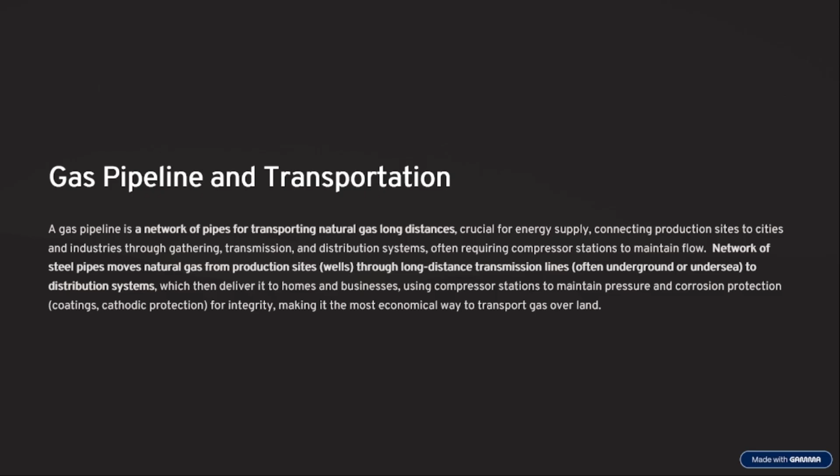All right, so it could be done over sea or underground. Sorry, under the ground or under the sea. It all depends on what you are dealing with at a point in time.

So your piping in HYSYS involves modeling and simulating piping systems by specifying pipe size, flow rate, pressure drops, and temperature changes for fluid being transported in the process. The software provides comprehensive tools to define pipe characteristics and predict fluid behavior under various operating conditions.

So you have your pipe systems, which defines the pipe characteristics, including the diameter, the length of the pipe, the insulation, and material using the piping blocks in the simulation. So we have the pipe segments, we have the pipe hydraulics in Aspen HYSYS, which you could be using to simulate that. And you need to put in the diameter, the length of the pipe. You can also add things like elevation, depression, and all of that in your simulation for the pipe.

Then you have the flow and pressure drop. It calculates pressure drop due to friction, elevation changes, and fittings using the Darcy-Weisbach equation or empirical correlations. All right, so along the pipe, definitely there's going to be pressure drop. That's why we have compressor stations situated at certain locations to enable us to boost the pressure of the gas to enable the transportation of that gas.

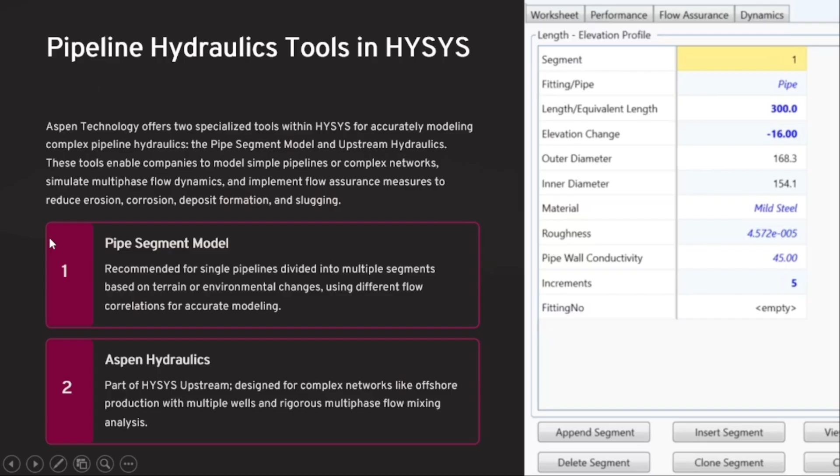All right, then we have the Aspen Hydraulics. So it's part of HYSYS Upstream designed for complex networks like offshore production with multiple wells and rigorous multi-phase flow mixing analysis. Okay, so the thermodynamic properties and pipe insulation.

Now, one thing with HYSYS is definitely any calculation that's been done on HYSYS deals with thermodynamic properties. We have different thermodynamic models in Aspen HYSYS, which could enable you to perform any simulation you want to, depending on the process. So if you are going to be dealing with things like dehydration process, making use of things like triethylene glycol, that's TEG, you can also make use of MEG and things like that, or you are trying to perform a reaction process. Definitely, there are different thermodynamic models that enable you to perform these simulations on Aspen HYSYS.

So the thermodynamic model is one of the fundamental things we need to understand when trying to make use of Aspen HYSYS, because using the wrong thermodynamic model is likely going to give you wrong results. Yes, you might have results, but those results might not be accurate because you didn't make use of the appropriate thermodynamic model. All right, so thermodynamic properties and pipe insulation.

So we have fluid properties, and under that, HYSYS defines thermodynamic properties of fluids, gases, liquids, or slurries, and calculates flow behaviors in pipes. The software employs fluid models such as the Peng-Robinson, which is one of the most common thermodynamic models used in Aspen HYSYS, or the Redlich-Kwong equation of state to predict phase behavior and fluid properties accurately.

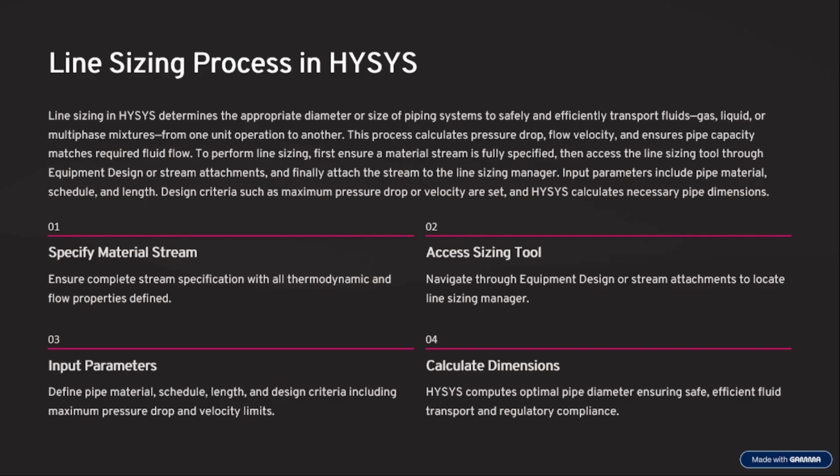All right. So now line sizing involves a trial and error process to find a pipe diameter that meets both velocity and pressure drop criteria for a given flow rate and fluid. So usually the general formula is the flow is equal to the velocity times the cross-sectional area, where the area is calculated using the pipe internal diameter with the formula, that's the area of the pipe, which is pi d squared over 4, where d is your diameter.

All right, and this calculation often uses a preliminary diameter based on the maximum velocity and then checks the resulting pressure drop against design limits. All right, so usually whenever you're trying to calculate the appropriate size of the pipe that should be used, most times it's always advisable to make sure the velocity of that pipe is less than 25.

Sorry, the velocity of the gas that is being transported is less than or equal to 25 meters per second. It's usually advisable to keep it within that range, less than or at 25 meters per second. It's very important. That's another key thing. So remember, we said this is a trial and error method. Most times you try with different pipe schedule and size. Once you calculate it, you get the velocity.

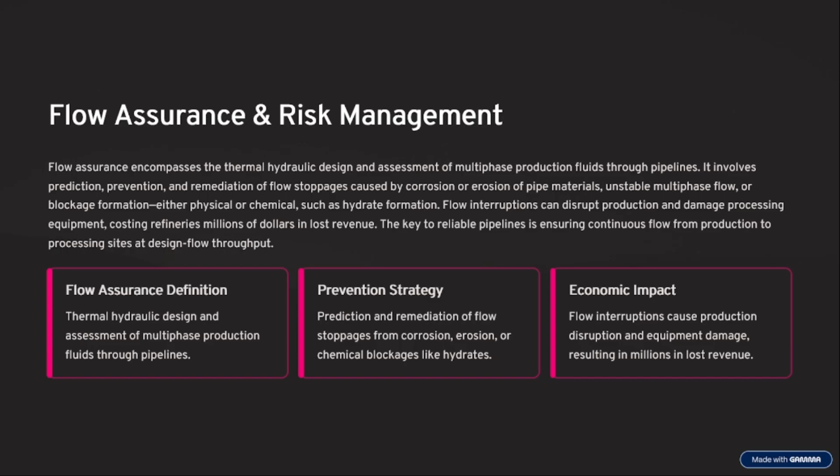So now let's look at hydrate formations. We've talked about a lot of things. We've mentioned hydrates. So now let's look at what this hydrate is all about. So hydrate formation in pipelines occurs when water molecules trap gas molecules like methane, ethane, or propane in a cage-like solid crystalline structure under high pressure and low temperature conditions.

So most times your hydrate forms when water is present and then some hydrocarbons such as your methane, ethane, propane. We still have some things like nitrogen, CO2. When all these things are present, it causes a crystal structure to form. Most times it might look like ice, but it's not really ice.

It just forms a crystal structure, and then this could actually block your pipes once this is being formed. Okay, so when this is formed, it could block your pipe, which could cause equipment damage, production loss, and safety hazard. So we need to try and observe the operations of this pipeline, all right, because most time this happens under high pressure and low temperature.

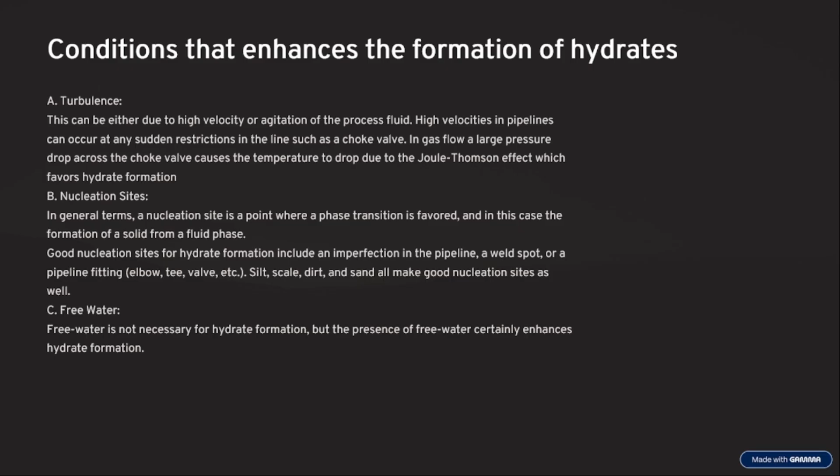Another one is the nucleation site. In general terms, the nucleation site is a point where a phase transition is favored, and in this case, the formation of a solid from a fluid phase. So good nucleation sites for hydrate formation include an imperfection in the pipeline, like a weld spot, or a pipeline fitting, which could be the elbow, the tee, or the valves, silt, scales, dirt, sand. They all make good nucleation sites as well, all right? Then you have free water. Free water is not necessary for hydrate formation, but the presence of free water certainly enhances the hydrate formation. All right, so these are some of the conditions that enhance the hydrate formation.

So HYSYS uses a utility, which is the hydrate formation utility, which predicts the hydrate formation temperature of any defined stream for a given stream pressure and the hydrate formation pressure for a given stream temperature. So what this does, it observes the temperature and the pressure, and then it sees at what point you are going to have hydrates being formed in that particular stream, especially when designing the pipeline for that stream.

All right, so to model the hydrate formation in pipeline in HYSYS, you must first define the fluid package. Remember, I talked about fluid package, your equation of state, and most times for this particular simulation, we are going to be using the Peng-Robinson equation of state, and the stream properties, which include water and other components. Then you create a pipeline model and use the hydrate formation utility or hydrate analysis feature to determine the hydrate formation temperature at various pressure and temperature conditions along the pipeline. The simulation predicts hydrate formation if the actual stream temperature is below the calculated hydrate formation temperature.

So now let's look at hydrate prevention. All right, so how do we prevent hydrates from being formed in your pipeline? The first one involves the removal of water. All right, these are ways we can prevent hydrate from being formed. We can remove the water, alter the temperature or pressure, or use chemical inhibitors to stop solid ice-like crystals from blocking the flow, using methods like glycol dehydration, injecting methanol or glycols, or applying low dosage inhibitors to disrupt the hydrate formation under high pressure and low temperatures. We are going to be seeing how some of this works very soon.

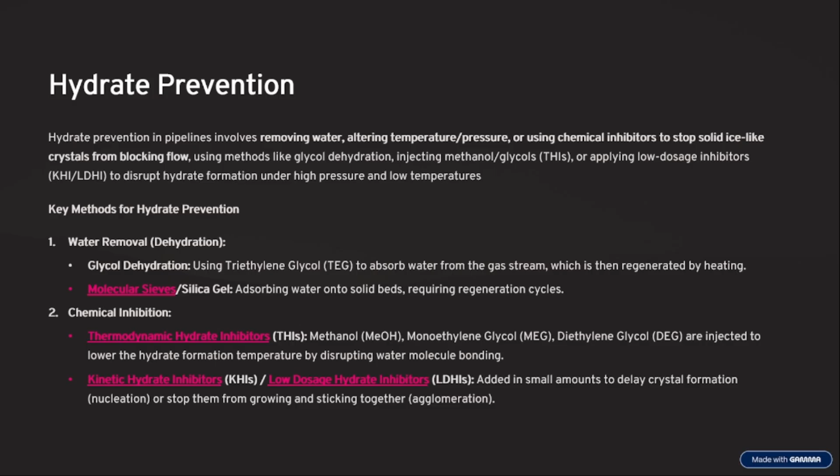Then you have the operating condition control. Remember, low temperature, high pressure causes the formation of hydrates. So you need to alter this operating condition so that you don't have hydrates being formed. Then you have your heat conservation, so your insulation for subsea lines. Insulation helps to retain heat, keeping the temperature above the hydrate formation conditions. All right, so these are part of the ways to prevent your hydrates from being formed.

All right, so before we quickly go into the simulation, we can take questions for just 5 minutes. Any question so far? All right, so I think we don't have any question. Any doubt? All right, so if you understand what I've been saying, you can just drop a thumbs up. Yeah, drop a thumbs up.

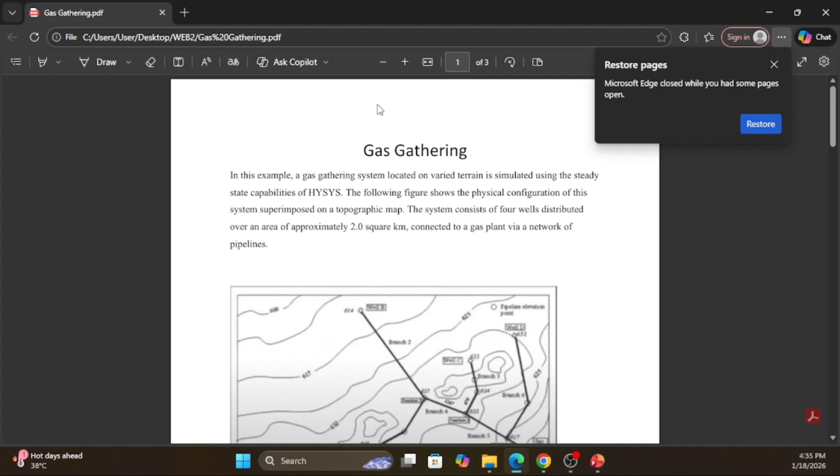So part of the things we are going to be looking at is a simple gas gathering process. Some of us might have seen this before, but if you've not, we're going to be dealing with a gas gathering process because this is one of the best ways to explain how gas is being transported. Some people might have seen different videos on YouTube, but there are some things you need to understand with this process of gas gathering, which we are going to be dealing with today as well. Let's just wait.

Yeah, okay, someone's hand is raised. Yes, Sid, I can see your hand is raised. Any question? Hi, sir. Is it an exercise or what should we do? All right, so it's going to be an exercise. We're going to go through it together. I'm going to show you how it's being done, so you don't need to bother too much. Okay. Yeah, okay, I'm coming. All right.

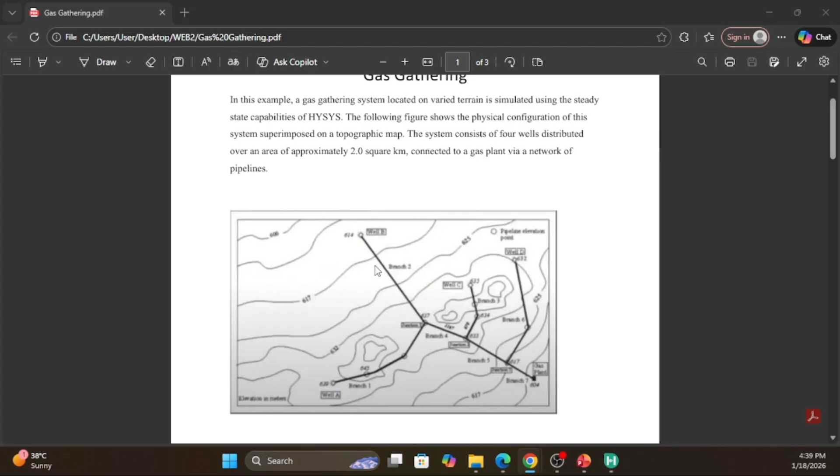Now, the main idea of this is that this is where geologists and chemical engineers come into play, because to interpret this particular pipeline, you also need geologists. These are the ones that will tell you how the terrain is like, what elevation you're going to be having, what depressions you're going to be having, and then you'll be able to input all of this into your HYSYS model.

What we have here is a topographic map, and these lines you see here are usually called contour lines. For some of us that did geography in high school, or secondary school, as we call it in Nigeria here; other places they call it high school. So people that did geography should know that these are called contour lines.

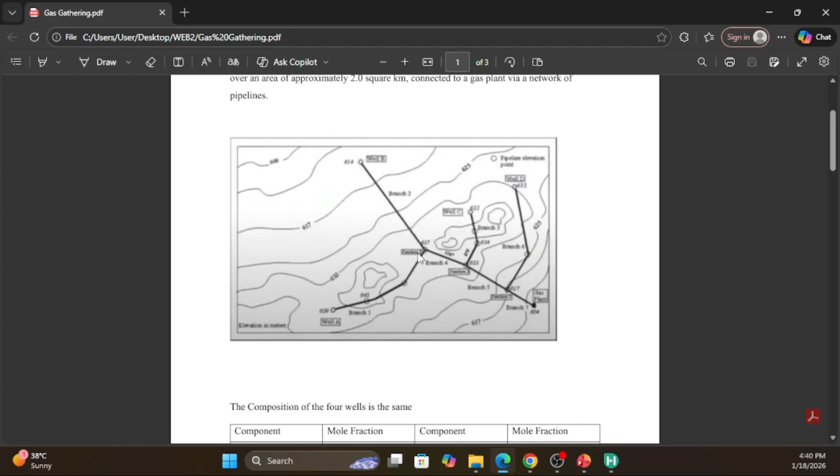This is your topographic map, and this is how the gas is supposed to be transported. These dark lines here are the pipelines. All right, so let's quickly get to it. Let's get our components and then we move on. So let me split my screen.

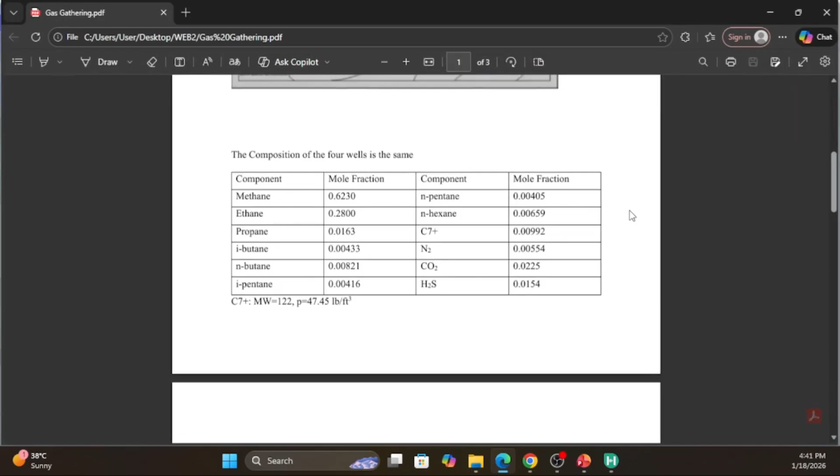Okay. So let's quickly add the components. We're going to start with methane, ethane, propane down to n-hexane. All right. So let's just add that.

This C7 plus is supposed to be a hypothetical component, but I'm just going to add heptane to represent it. That's why we have this molecular weight here and the liquid density for it. These are the key things to define this particular C7 plus. But I'm just going to use heptane for it for now. So just going to add all of this.

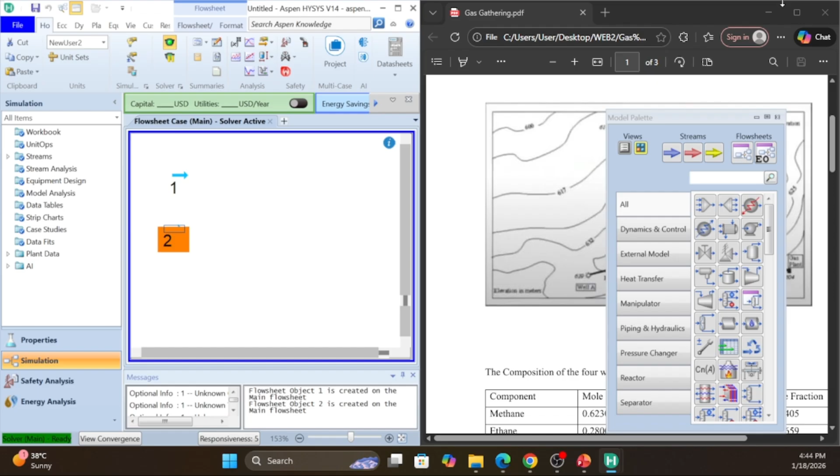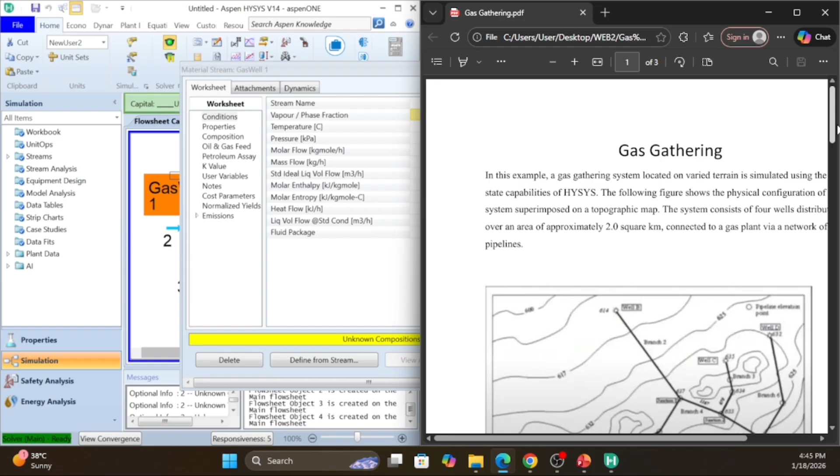So I'm just going to quickly start by adding 4 streams, and these 4 streams would represent our different gas wells. You can see we have well A, well B, well C, and well D. Well A is going to be my gas well 1. And then let's quickly get the specifications for this. So from what we have here, all of them are using the same mole fractions. They have the same composition. So let me just add the composition for this.

So we have 0.623, 0.28, 0.0163, 0.00433, 0.00821, 0.00416. N-pentane 0.00405, 0.00659. We have N-heptane 0.00992. Then nitrogen is 0.00554, and then CO2 is 0.0225, and hydrogen sulfide is 0.0154. All right, so after you add your mole fractions, all of these have to add up to 1.

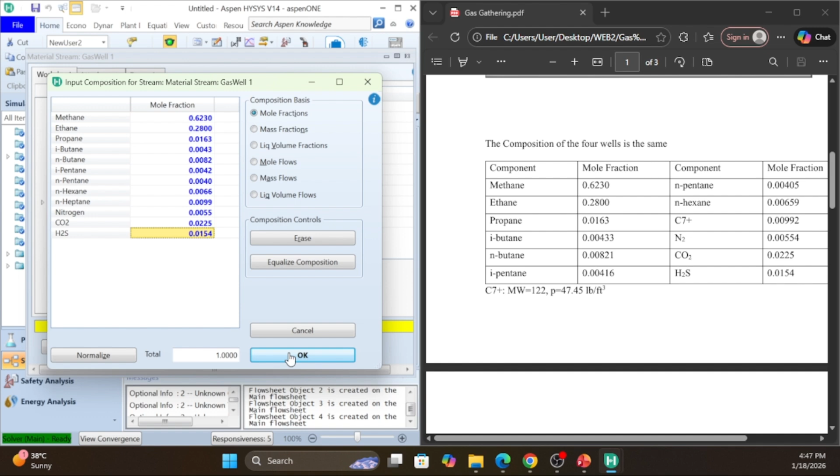If you are defining your flow rate in mole flow, it's advisable to give your fraction in mole fraction. If your flow rate is in mass flow, your fraction should be in mass fraction. If your flow rate is in mole flow, your fraction should be in mole fraction. So these are some of the things we need to note when designing with Aspen HYSYS. The next thing we are going to look at is our temperature, pressure, and the flow rate.

So the flow rate here is in mole flow. You can see kilogram mole per hour. So we go back to conditions and put in the temperature for gas well 1, which is 40. We have a pressure of 4135 kilopascal, and then the mole flow is 425. Okay, so with that, we go forward. You can see this stream is fully defined. That's why you have this indicator here showing OK, and you can see this has a deep blue on it compared to this one, which is lighter blue.

So the next thing we are going to be doing is defining the remaining gas wells. So remember, they all have the same mole fraction. So I'm just going to name this gas well 2, which is your well B.

All right, and then I'm going to call this, okay, the temperature for this one is 45 degrees Celsius. We have a pressure of 3450, and we have a mole flow of 375. Now we need to define the composition. Because I've defined it in the first one, I don't need to start inputting the composition again.

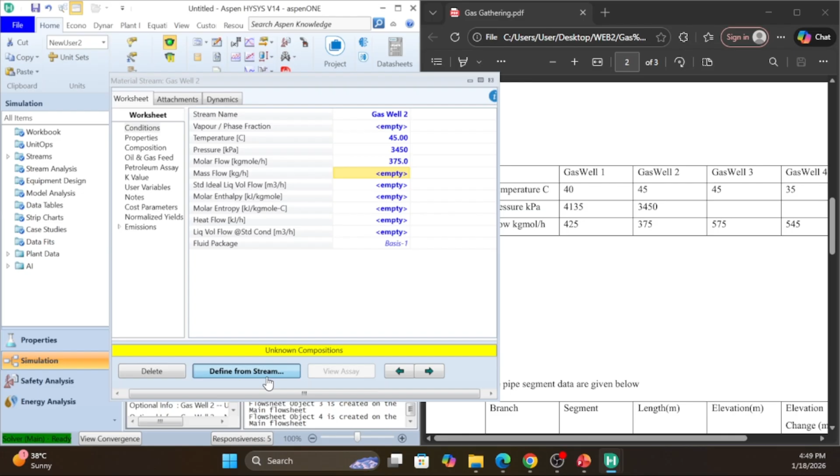All I need to do is go to define from stream. I'll select my gas well 1 and then take off this, take off all of this and just select composition. So this is copy stream condition from gas well 1 and I'm sending it to gas well 2. All right, so with that, you can see the indicator is showing OK, meaning that this stream is fully defined and ready for use. Now I'm going to define the third one.

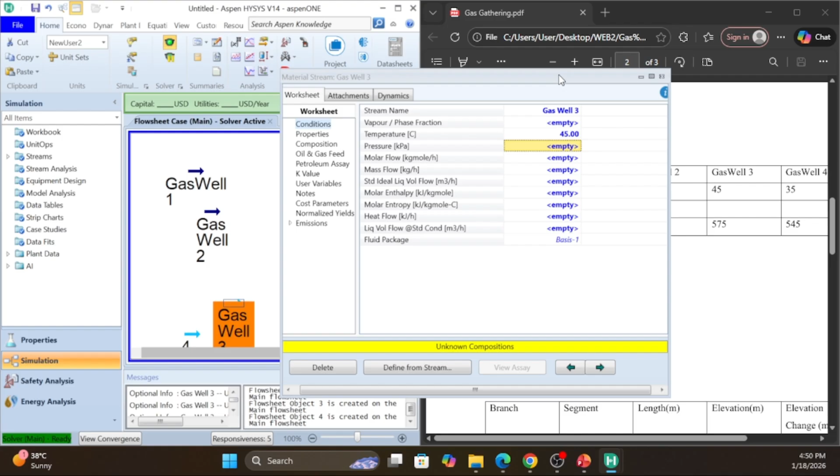All right, okay, I'm going to define the third one. I'm just going to call this gas well 3. Okay, and the temperature for this is 45, and the flow rate is given as 575. All right, so what I just need to do now, I'm going to make use of the pressure of gas well 1 for my gas well 3. To do that, select the composition and pressure from gas well 1, and I'll use it to define this, and then let me do the last one.

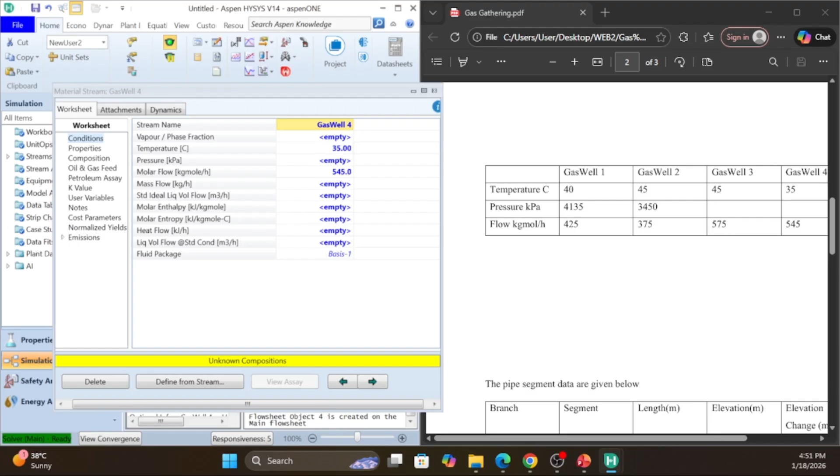All right, so this is gas well 4, and the temperature there is 35, and your flow rate is 545. All right, then your composition, okay, we're just going to use the pressure from gas well 2 to define this. So what to just do here, define from stream, and then yes, gas well 2, pressure and composition, click on OK, and we are good to go. All right, so now we have our 4 wells defined.

Now let's start with our pipes. So the first one we are going to be making use of is the branch 1, which is for gas well 1. And then this is the branch here. And for this branch, we are having 3 segments. So from here to here is segment 1. From here to here is segment 2. And from here to here is segment 3. So these are the sections along this pipeline. So we're going to be having 3 segments for branch 1. So let's quickly add that.

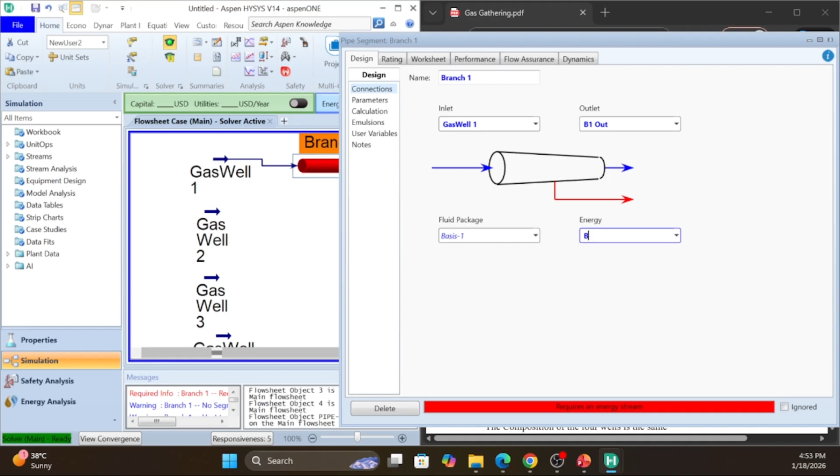Let's get our pipes. So we have pipe segment. So we just put this here. And then we name this branch 1. Our inlet is going to be gas well 1. And our outlet is going to be B1 out. That's just to represent branch 1 out. And then your energy stream, which is compulsory, we will just name this B1Q, which is branch 1 energy stream. Okay. Now we go to ratings and then we add the segment.

Now for this one, we have some specifications. Remember we have 3 segments here, and I've explained to you how this segment looks on the map. So this is branch 1, segment 1, 2, and 3. So for segment 1 here, the length is 150. So we have 150 meters, and then you have an elevation of 645 meters, but it's the elevation change we are going to be making use of, which is 6 meters. So we have elevation change here, 6 meters.

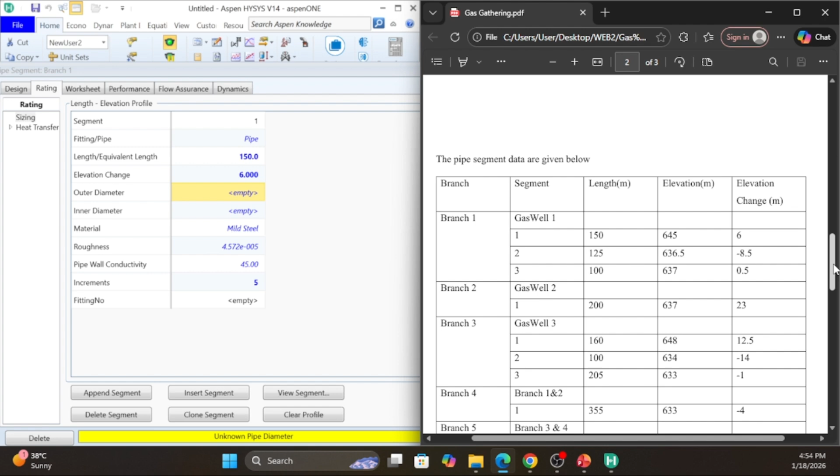Now to select the diameter, this particular one has already been calculated and they've already gotten the size of the pipes. So we just come here. This is the diameter here, 76.2. You can double click on the outer diameter and this will come up, or you go to view segments and you have this diameter come up. Now, this is the actual size. If you have the actual size of your pipe based on the calculations you've done, you can give that information here, just input it under actual.

And then remember I talked about different schedules, schedule 10, schedule 20, schedule 30, schedule 40. And each of the schedules has different diameters. Now, this is schedule 10, for example. The nominal diameter you can see from 350 to 900 millimeters. You see that it's quite high. Schedule 20, this is from 250 to 900. You have schedule 30, from 200 to 900. And then you have schedule 40, which contains the one we want to make use of. Remember our size is 76.2. So see we have from 6 to 900.

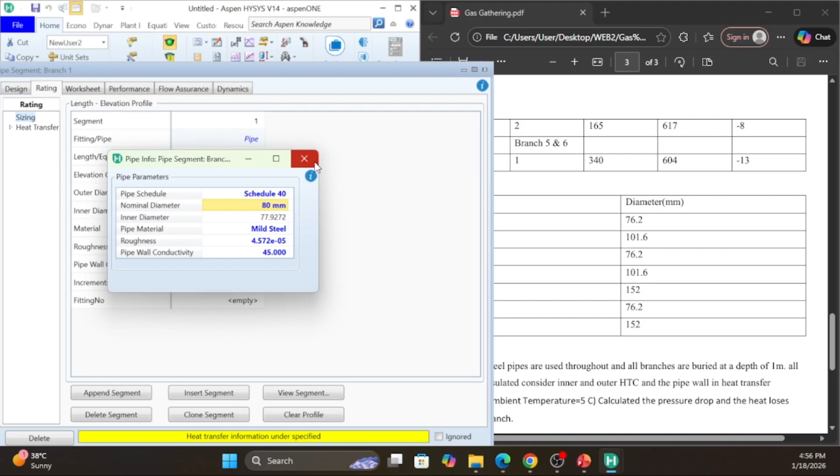So we're going to make use of schedule 40, and we don't have 76.2, but we have 80 millimeters. So most times you just go for the next size to the actual diameter that was given here. So we just go to 80 millimeters, and you can see the inner diameter is 77.92. And we close this, so you can see outer diameter is 88.90, inner diameter 77.93. Okay, now we need to add 2 more segments. So I'm going to click on append segment.

Click on it twice so that we can have segment 1, 2, and 3. All right, so let's add that. So the length of segment 2 is 125. Elevation change is minus 8.5.

Now on the map, the elevation is 645. That's where this first segment is. Now the difference between this elevation here and the next one: this negative sign represents a depression actually, not an elevation. Positive sign is for elevation, negative sign is for depression. So on the map there is a depression. That's why we have a change on the map.

And you see this is 636.5. And then you can see that is minus 8.5. So if you do a subtraction here, you see we have minus 8.5. So that's where this elevation change came about. And then the diameter, in the case of schedule 40, still make use of 80 millimeters. And then for the last one, this is length of 100, still making use of schedule 40.

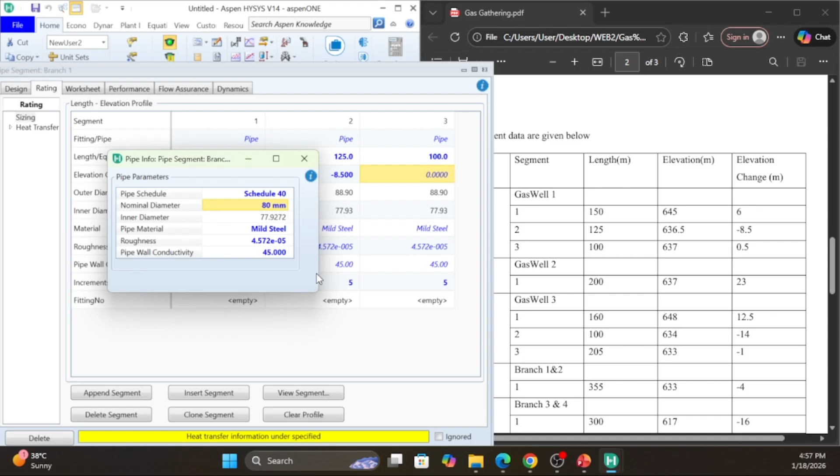Diameter is 80 millimeters. So you see from the notification bar here, heat transfer information is under specified. So we go to heat transfer and we are making use of estimate HTC. You can see schedule 40 pipes are used throughout and all branches are buried at a depth of 1 meter. All pipes are uninsulated. Consider inner and outer HTC and the pipe wall in heat transfer estimation. We have an ambient temperature of 5 degrees and then calculate pressure drop and heat losses inside each branch.

So you can see this pipe is buried at 1 meter. You can select the ambient medium. Is it air? Is it ground? Is it water? But this is on land, so we keep that as ground. Ambient temperature is 5. We include the pipe wall, inner HTC, and outer HTC. And there is no insulation, so we don't tick this. And then you see that your pipe is ready for use.

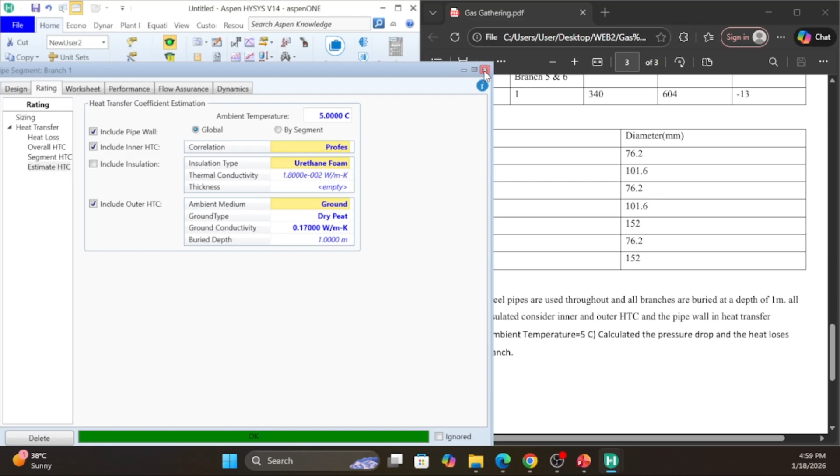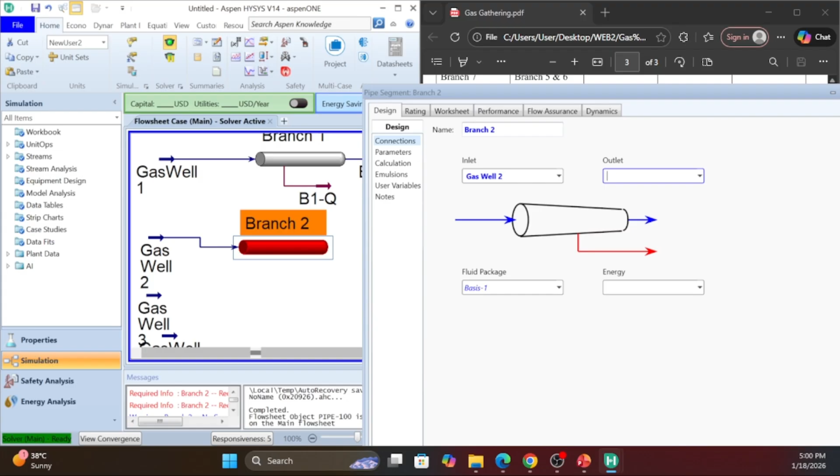All right, so that is for branch 1. So let's quickly do branch 2, 3, 4, 5, 6, and 7. I believe it could be done in the next 15 minutes. Okay, so gas well 2, I'm going to call this branch 2. And then we call this B2 out. And I'm going to call this B2Q for my energy stream.

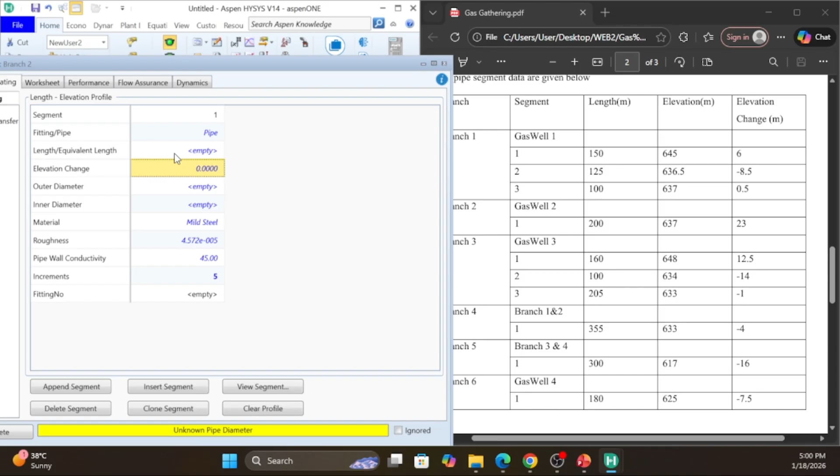Okay, so let's quickly go to ratings and put in the necessary specifications. So this is B2. You can see it's just a single branch. We don't have any demarcations in between. So we have just one segment, and I'm going to append just one segment, with a length of 200 and elevation change of 23. Branch 2 has a diameter of 101.6. So schedule 40, and we are going to be using 100 for this one.

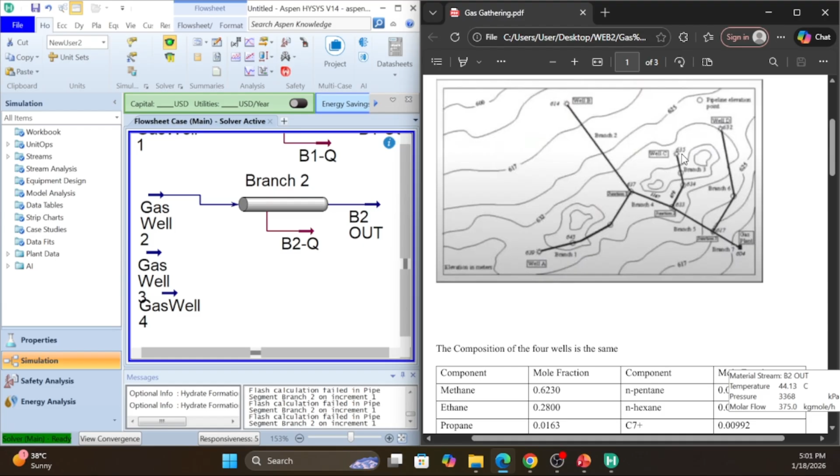Okay, and then we go to heat transfer using the same data. Just make this 5 degrees Celsius, and this is solved. Now let's quickly go to branch 3 so that we add it appropriately. So this is branch 3 for gas well 3, and you can see we have 3 segments as well. From here to here is 1, here to here is 2, and here to here is 3. So we have 3 segments on this particular branch.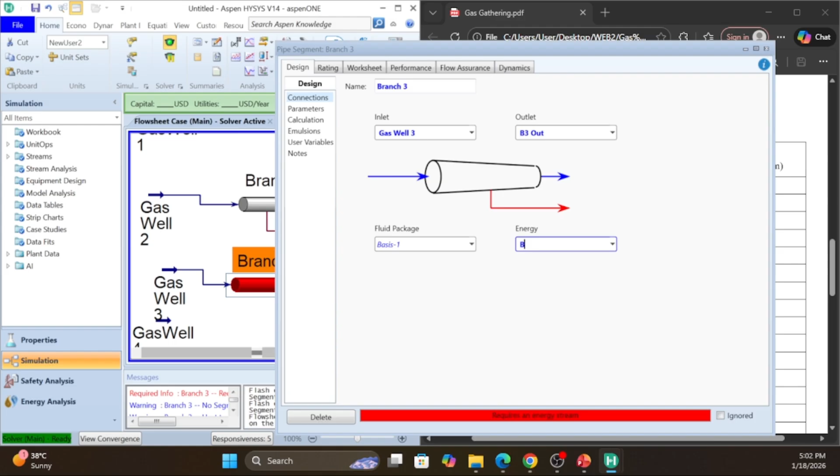All right, so let's quickly add that. Pipe segment. Gas well 3, branch 3. And then we call this B3 out. And we have energy of B3Q. Okay, so the segment has been added. So add 3 segments. So let's quickly give the specifications for the 3 of them.

So the first one has a length of 160 meters. The second, okay, it has an elevation of 12.5, and the diameter for this one for branch 3 is 76.2. So we're going to make use of 80. So schedule 40, nominal diameter 80. All right.

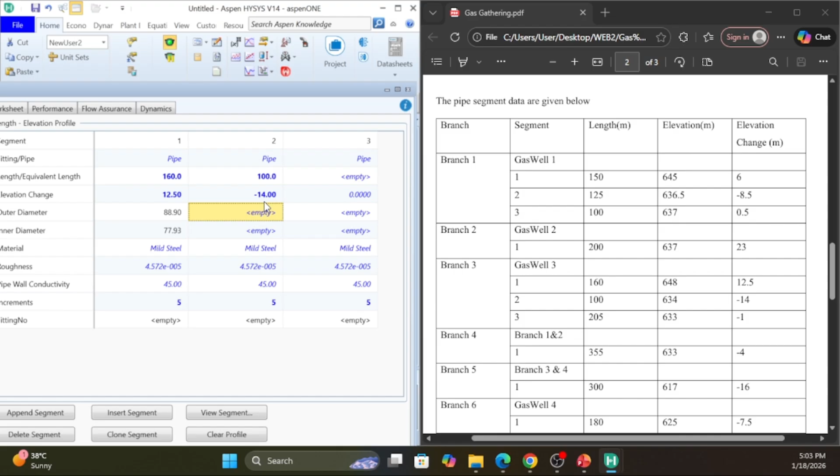So we have segment 2, which is 100 length. We have elevation change of minus 14. So that's actually a depression going on there. And then we have the outer diameter, nominal diameter, schedule 40, 80 millimeters.

Okay. And the last one is 205 with a depression of minus 1. And then we have, okay, schedule 40, 80, and yes. All right, so let's quickly give the heat transfer estimate. All right, and this is 5.

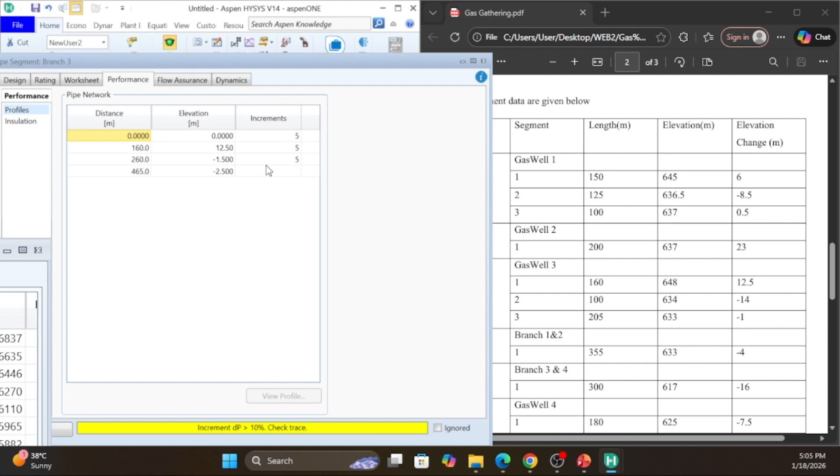All right, so now you can see that we have increment dp, as the change in pressure is greater than 10%. So usually this happens in your underperformance. If I check the profile, usually the dp is not supposed to be greater than 10% of the pipe. So once you do an addition, it should not be greater than 10%. So that means the pipe is too small for the amount of gas you're trying to transport.

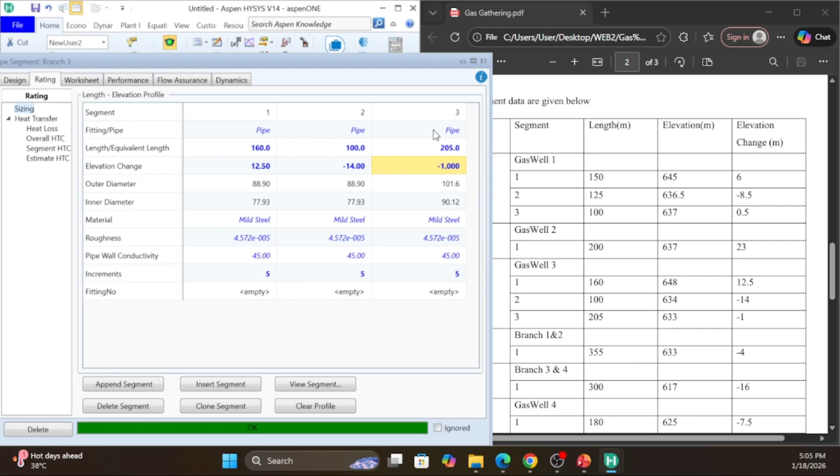So usually what you just need to do in such situation is to increase the size of the pipe. So I'm going to increase the size of the last one. I'm going to go to just 90, and then yeah, so this is okay. I'll be explaining this better in a bit. So let's quickly do some add-ons.

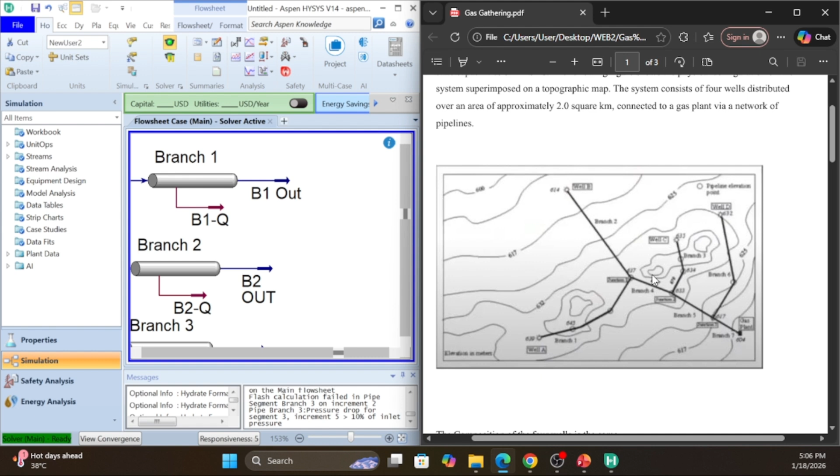So we have branch 1. All right, so we're going to connect this real quick. Branch 1 and branch 2. This is a junction 1 here. You just make use of the mixer for this. So just going to call this junction 1, and then my outlet is going to be J1 out, and my inlet is B1 out. Remember, we're connecting branch 1 and branch 2, B1 out and B2 out. And we close this.

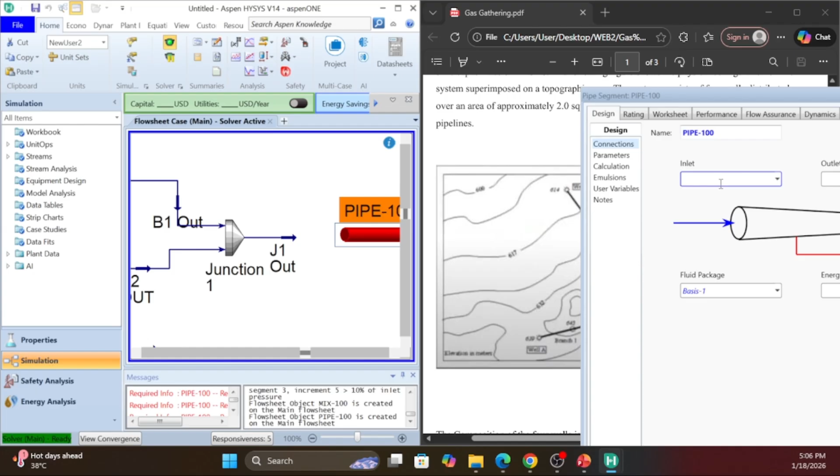Then we quickly add the branch 4 here. This is branch 4. So I'm just going to add this. That's another pipe. Okay. So this is J1 out coming in here. And then this is branch 4. Okay, and then we call this B4 out. All right, and the energy here is going to be B4Q.

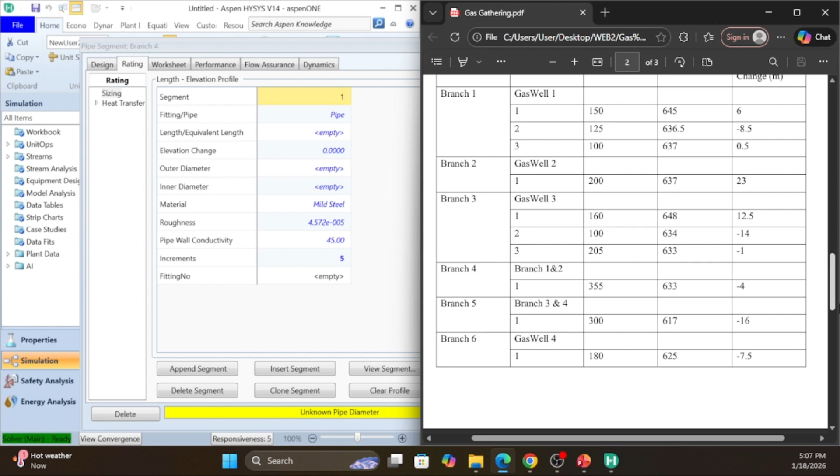So just quickly put in the pipe segment. This is just one from here to here. It's just one straight line, no other segments in it. So we just append one segment and then we add the specifications for this. So we have a length of 355, an elevation change of -4, and this particular segment should be 101. Yeah. So schedule 40, we make use of 100 for this. All right.

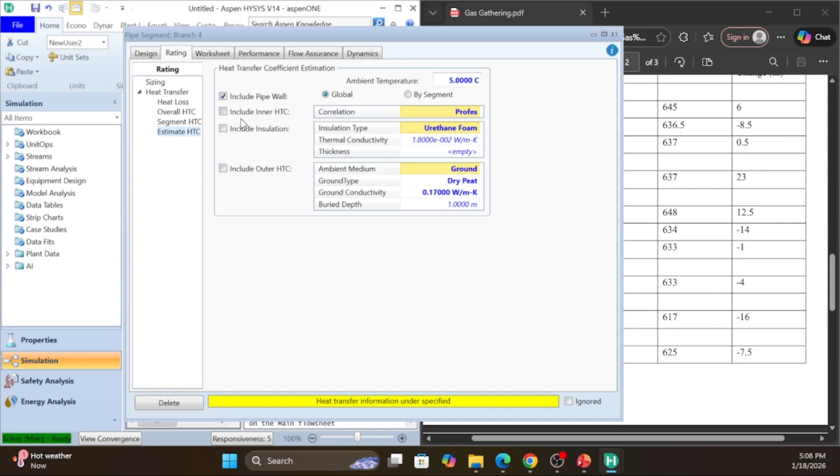So heat transfer, keep this on 5. Sorry, estimate, go to estimate HTC. Keep this on 5. And then we are good to go. So the next thing to add is your, okay, so we need to combine branch 4 and branch 3 together. So this is junction 2. So let's quickly add another mixer to this now, representing junction 2.

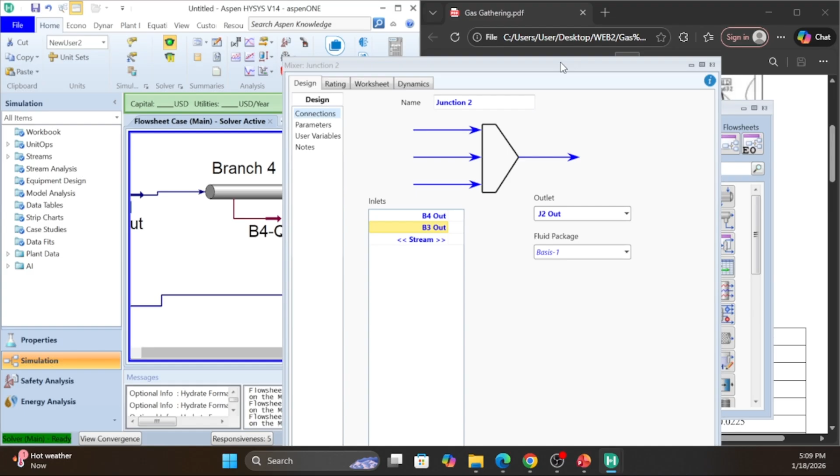Okay, so this is junction 2. All right, and then we add B4 out and B3 out, and we call this J2 out. That's junction 2 out, and I think this should be ready for us to use. Close this. All right, so we've been able to add that. So now let's quickly add branch 5 and then branch 6 and just deal with branch 7.

So branch 5 is also a single segment. You can see there is no division going on in here. We just have no segments, just one straight line here. So we add one pipe, another pipe here. So we're going to call this branch 5. Our inlet is going to be J2 out, and we call this B5 out, and this is going to be B5Q.

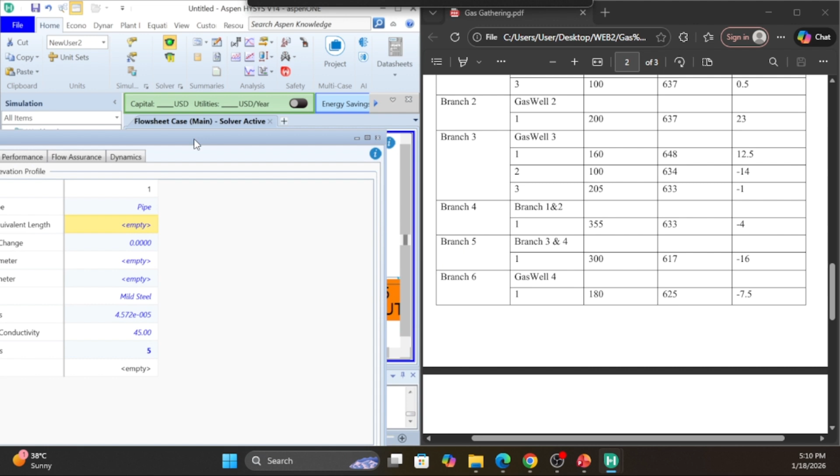So we quickly add segment to it. Remember, it's just one. So this is branch 5, and then we have length is 300 meters, and then we have elevation change of -16, and then we have an outer diameter. I think this should be 152. So we just make use of schedule 40. Yes, we use 150 for this. And then we specify ambient temperature of 5. All right, so this stream is ready.

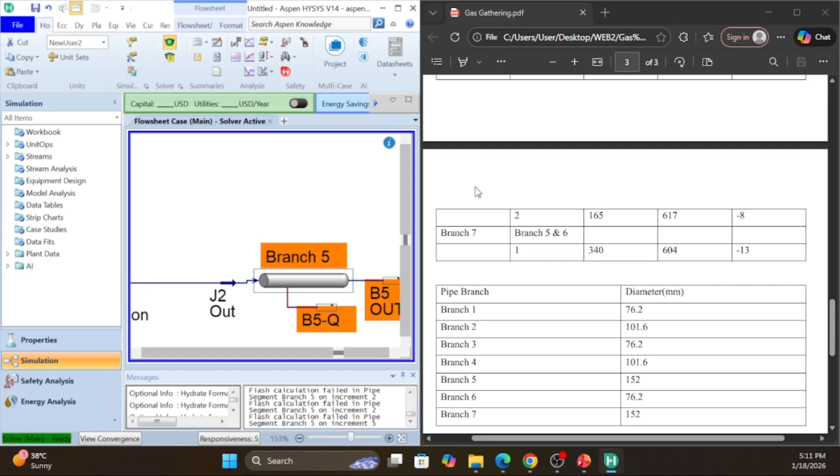Now let's quickly add the last one. Okay, last two actually. Still have two more to add. So we have not done that of gas well 4. So let's quickly check gas well 4. So gas well 4 has two segments. So from here to here is one segment, from here to here is another segment. So we're just going to make use of two segments for this. Okay. So we add the pipe. So this is gas well 4, and we call this branch 6.

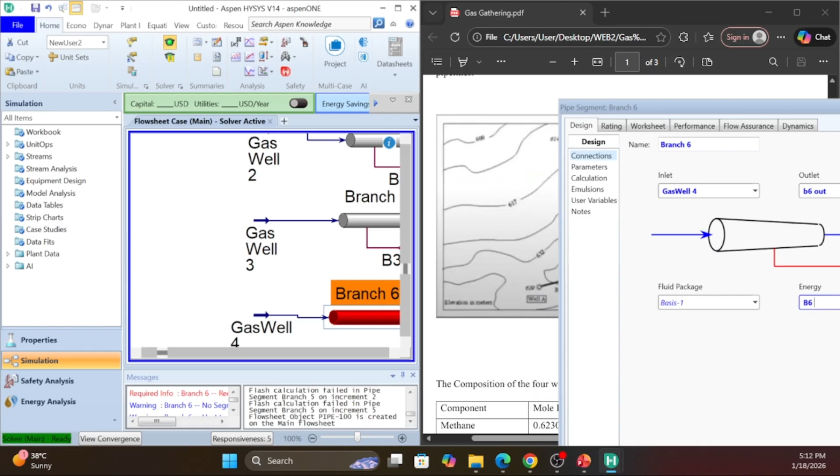Okay, and then we have the outlet for B6 out. Okay, and the energy stream is going to be B6Q. All right, so let's quickly add the segments. Remember, this is having two segments. So segment 1 and 2, and then let's give the specifications for these two.

All right, so this is branch 6. So the length is 180 for the first one, and then we have elevation change of minus 7.5, and this should be one, let's see, branch 6 is also 76.2, so schedule 40, I will make use of 80. So the length of the segment 2 is 165 meters, and elevation change is minus 8. So change this to schedule 40 and then making use of 80 here.

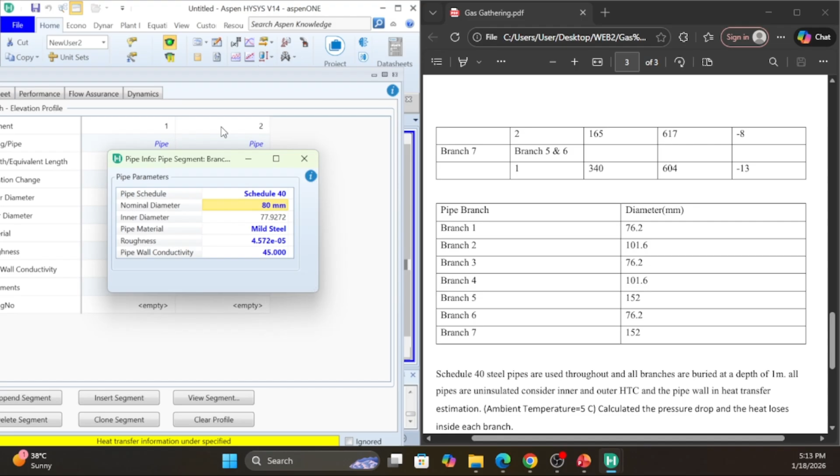So now we quickly go to the heat transfer, and then we add 5 here. So this is not solved. We are likely going to have to increase the pipe size. All right, we're going to increase the pipe size, right, because this cannot accommodate it. Let me check on the performance. Let me quickly look at the velocity. I think those are part of the things that affect.

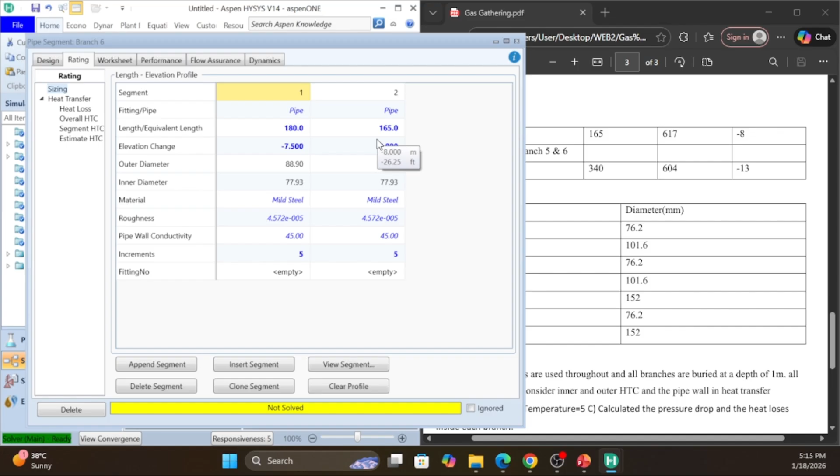Okay, so you can see vapor velocity. We are having something above 25. Is 25.7. Remember, I said we should try and keep everything under. So I'm just going to increase the size of this pipe here. Under rating size. So we're just going to increase the outer. All right, so let's go to 90. All right.

So let's go back and check. You can see vapor velocity is less now. You can see that 22. The highest we're having is 22.6. So, all right. So I'm going to close this. All right. So let's quickly add the third junction and the last and final branch. So this is junction 3. It's going to be with the mixer.

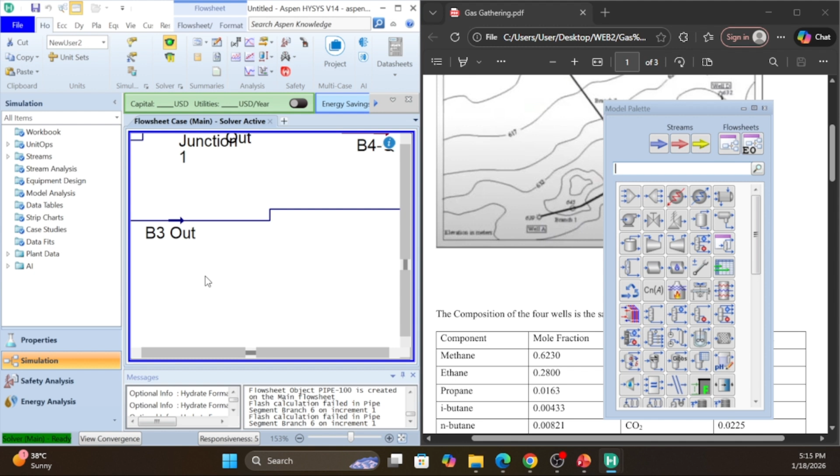Before I proceed, let me save this, because it's always advisable whenever you're working with HYSYS, try and save your work, because sometimes anything can happen and you could lose it. So I'm just going to put web 2 for this as webinar 2. All right, so yeah, let's quickly.

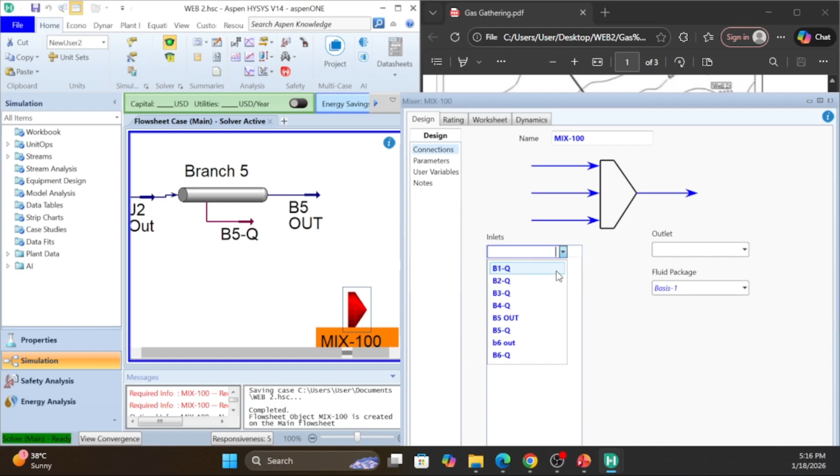So I was about to add junction 3. Move this forward. Okay, so B5 out and B6 out, and this is J3 out, because this is called junction 3. Okay, so I'm just going to close this, and then we add the final branch, which is to the gas plant. Let me add this here.

All right, so you can see we have just a single, no division in here, just a single segment. So we call this branch J3 out. That's our inlet. Our outlet, I'm just going to put to gas plant. All right, and then energy stream. This is branch 7. Okay, so we call this B7 out. All right, segment added.

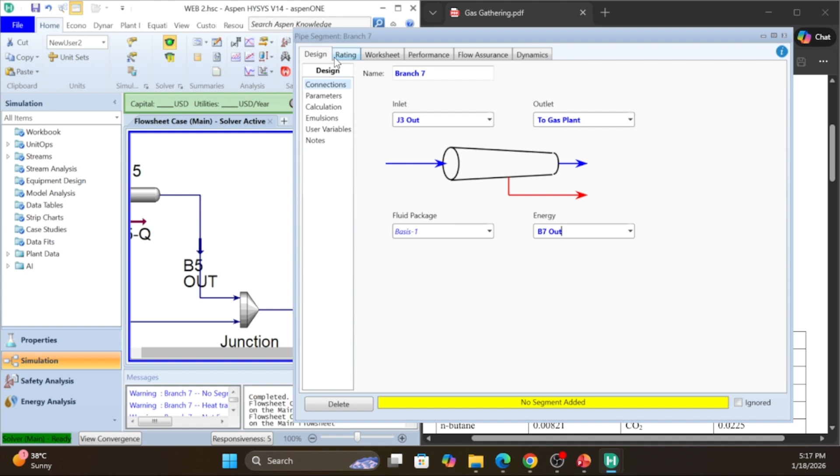All right. Can everyone hear me? If you can hear me, give a thumbs up. All right. Yes, sir. Okay.

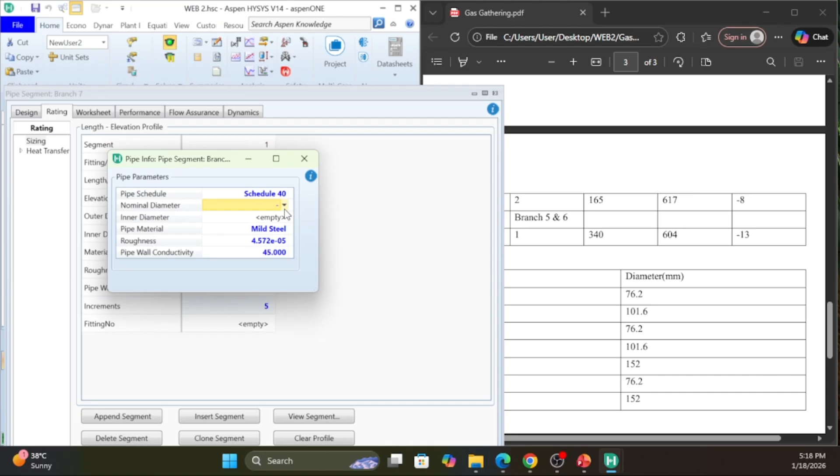All right. So let's go on. So we have length for this branch 7. All right. So the branch 7 here is 340 meters. And then we have elevation change of minus 13. And I think this should be 152. So make use of 150 here. So let's deal with the heat transfer. 5, inner, outer.

Sir, sorry. Could you explain the reason for the ambient temperature we choose? You have chosen 5 degrees Celsius. Yeah. What is the reason for this choice?

All right. The reason for the choice of the ambient temperature is due to the surrounding of where the pipeline is passing through or is being transported through. So for this particular one it is transported 1 meter below the ground, and then the ambient temperature surrounding the pipe, because definitely they would have taken measurements and checked the temperature around the pipe, and it was discovered to be 5 degrees Celsius. So that's why we are making use of this.

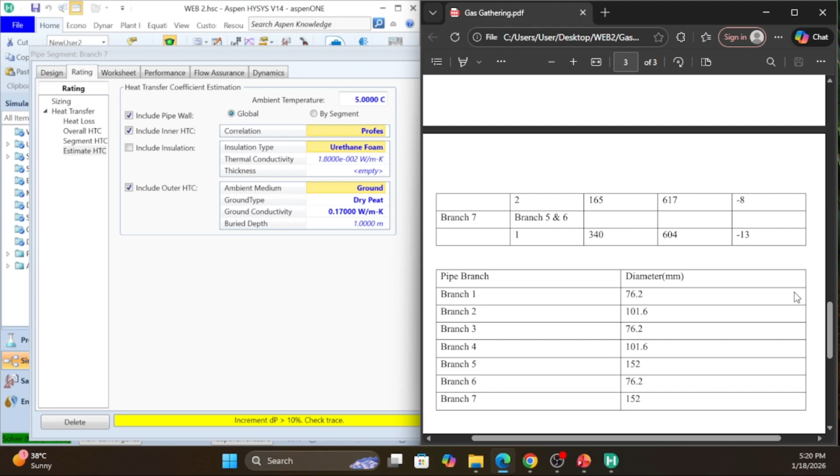It all depends on the terrain you are using. So if it's underwater, it could be less than this. If it is above the ground level, it could actually be above the 5 degrees. It all depends on what the geologists have done, and then they'll give you the specifications on that. All right, does that answer your question?

Okay, so let's move on. So now we're having increment delta P, so we just need to increase the pipe size here real quick. 150 cannot accommodate this, so we go to 200, and yeah, so this is fully solved.

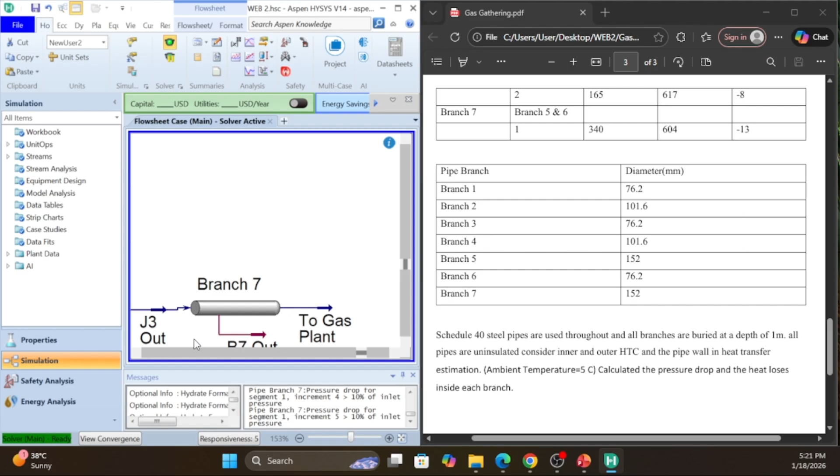So now let's quickly look at hydrate formation and see how we can also prevent it. Try to touch that within the next 9 minutes. All right, since we are done with this PDF here, this is what we have. Okay, so let me just use branch 5 as an example.

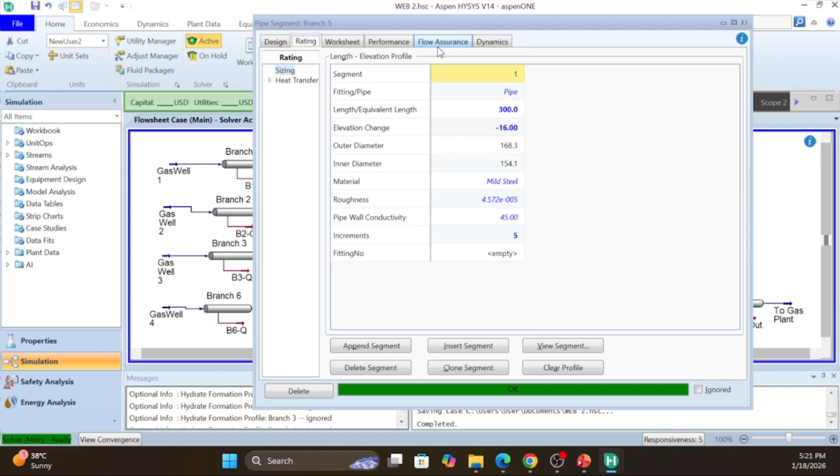All right, so now when you want to check when you're going to be having hydrates being formed, remember we talked about the flow assurance here, so this is it. So you click on flow assurance. You can do other analysis, corrosion, erosion, but our major focus here is hydrates. So we go to hydrates and then we click on do hydrate profile calculation.

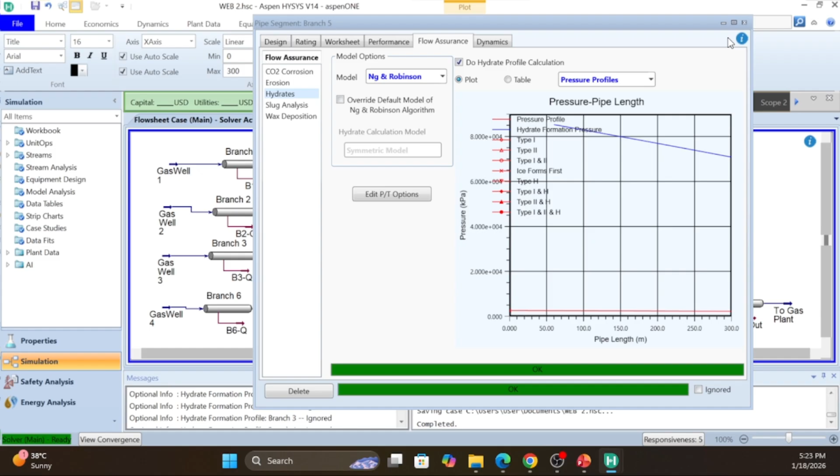We can check for pressure, and you can see that this is the hydrates formation pressure. So anything above this, we are going to be having hydrates being formed. This is our current pressure line. All right, so I can check this for other pipes as well. Let's check this one, branch 4. Just come here, hydrates.

Okay, so you can see for this one, any temperature below 14.32, you're likely going to be having hydrates being formed. And this is our current temperature profile. You can check that for the pressure as well, and you can see the pressure here. This is the hydrate formation pressure. All right, so yes.

Sir, I have a doubt. As you earlier said, hydrate requires moisture. But in streams we mentioned there is no moisture. So how will hydrate form? Yeah, I'll come to that. We have not done that yet. Right now, we don't have any hydrate being formed in our pipe, because all the conditions have not yet been met. I'm going to show you that too.

Now, I'm just trying to show you the temperature and the pressure where you're likely going to be having hydrates formed in your pipe. Remember, these are part of the key conditions required. So let's look at this stream, for example. I'll just go to attachment, analysis, create. Let's check the hydrate formation.

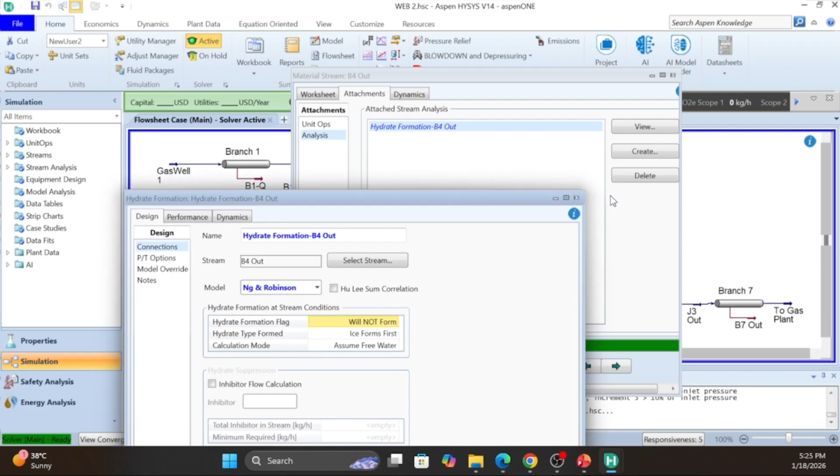And then you can see that for this stream, on the current conditions we have, it will not form. And even if we were to have hydrate formed on this stream, it's going to start with the ice form first. That's a different type. We have different types of hydrates in Aspen HYSYS: type 1, type 2, type H, and so on. So with all the conditions, hydrate will not form on this stream.

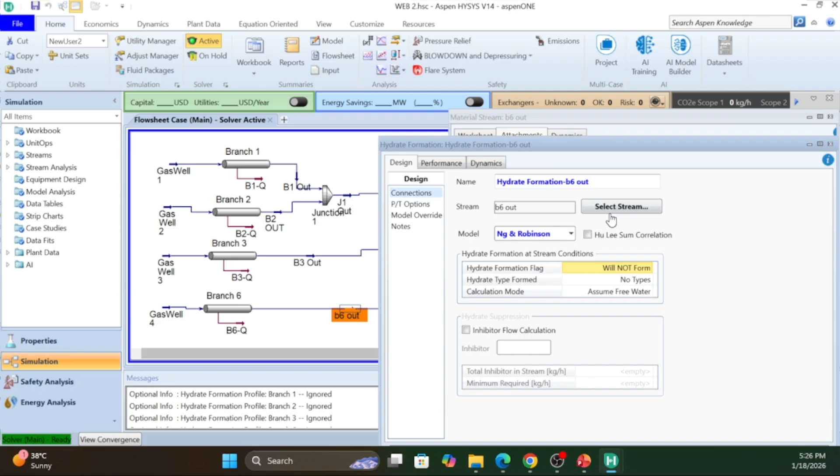I can also check B6 out. Let's just quickly look at that. Create and then hydrate formation. You can see will not form. On this stream, it's not going to form because of the current conditions. Now I'm going to show you when we are going to have hydrates formed in our streams.

All right, I know our time is precious. This was supposed to end by 5:30. We have 3 minutes to 5:30. I want to ask for 15 more minutes. If we all agree, I can go on. Are we all good? Can I take more time? I need more show of hands. I'm just seeing a few people.

All right. Okay. Thank you all. So let's add 15 minutes to it and let's get to it.

So now I'm going to add two things. I'm going to add water and an inhibitor to it. The inhibitor I'm going to make use of is methanol. All right, so I'm going to be adding these two components. So I'm going to start with...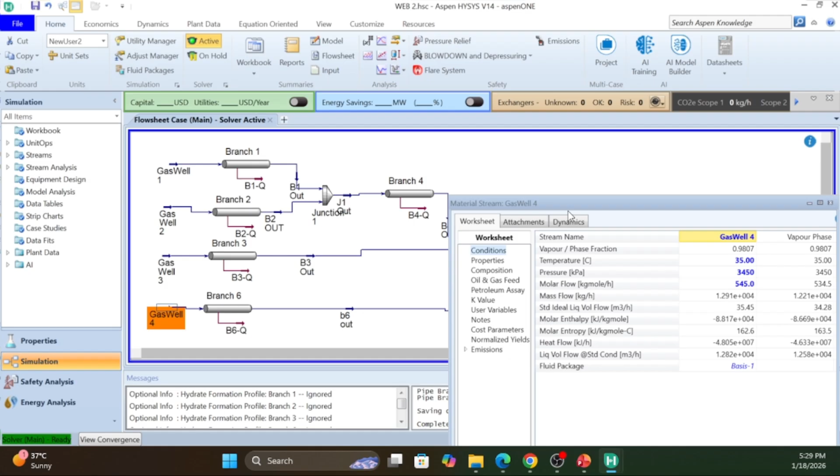All right, so for this one, I'm going to go to composition, and now I'm going to add water to it. So let's just say we have 0.04. Okay, I'm just going to normalize this, and so now we have water in this stream. I've not added methanol to it yet. So we just have water in this stream. So now let's check something. So this is branch 6. Let's check the flow assurance,

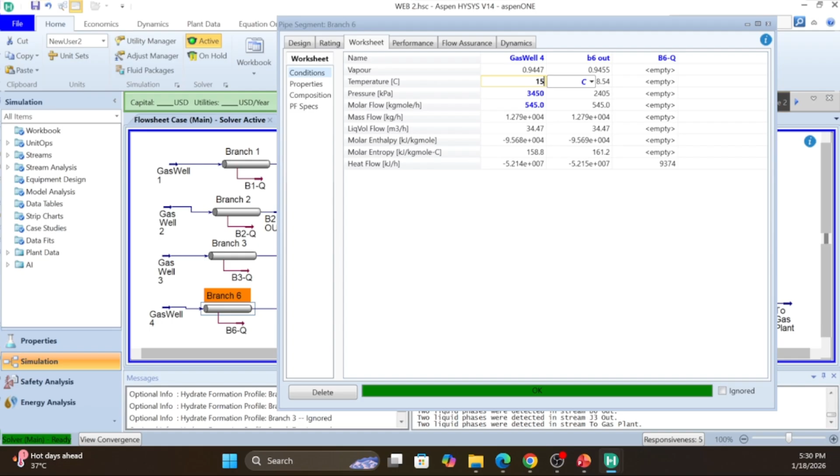hydrates, do hydrates calculation. So now it's telling us that this is the current temperature profile. The red one here is the current temperature profile. And then for hydrates to be formed, we need to have the temperature below 15. Okay, this is 14.5 actually. It has to be below 14.5. So now this is what I'm going to do. I'm going to change the temperature for gas well 4 to 15. Okay, and then now we check.

All right, so now you can see that we have hydrates being formed. Once the temperature crossed the hydrate formation temperature, we started having type 1 hydrates being formed. That's type 1 and 2 actually, because this is the legend for type 1 and 2. Okay, it's type 1, sorry, just type 1. Now, if I go to this stream here and check the analysis, you see that we have hydrates. Initially, it said will not form, but now you can see that hydrates will form.

Okay, so now the next thing we need to look at is how do we prevent hydrate formation? We talked about using methanol as an inhibitor. So now I'm going to add a little bit of methanol to this stream. Let's say I add about 0.02 to it. Just going to normalize everything. Click on OK. Now we can check. As I added methanol to it, you can see it will not form.

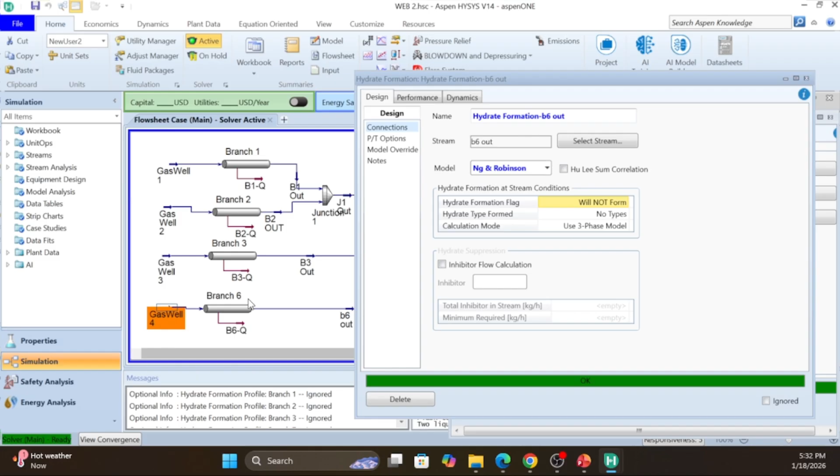What methanol does is it drops the hydrate formation temperature. Remember initially the hydrate formation temperature was about 14.5. This is still branch 6. But after we added methanol to it, you can see that the temperature has dropped to minus 11.46. That's when we are going to have hydrate being formed, based on the fact that we have methanol. So it dropped the temperature.

All right, so these are some of the things we need to take note of when we are dealing with pipe analysis, flow assurance, pipe analysis on hydrate formation. So now I've shown you how hydrates are formed and also how you can prevent hydrates from forming. So now let's quickly go to line sizing, which is the final thing for today.

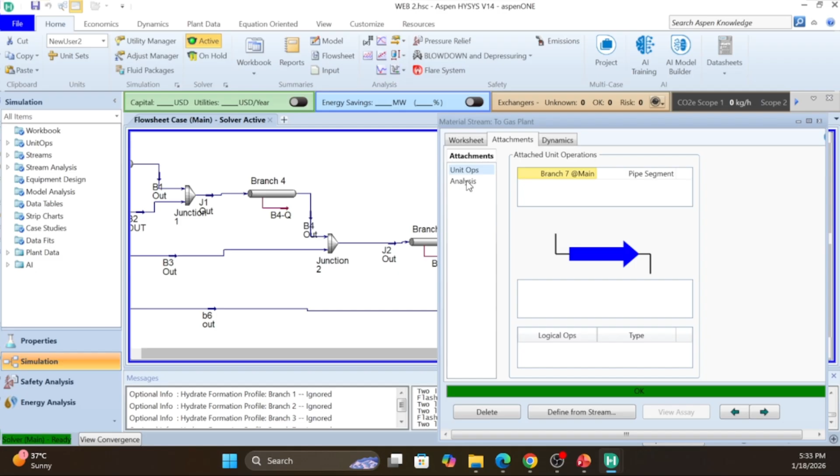All right, so let's go to line sizing. So I'm just going to work on this to gas plants. Let's just say we want to add another pipe to this. All right, so now to do that, we're going to double click on this. We go to stream attachments, we go to analysis, create, and then we come to hydrate formation, sorry, line sizing, add line sizing manager, and then we have this.

Okay, so we already have the pipe material selected, we have the schedule selected. All right, now we need to know the diameter of the pipe that we're supposed to use for this particular flow, and then the length as well. I'm supposed to give the length. So now let's say this particular pipe is supposed to move over 100 meters. All right, that should be the pipe length, 100 meters.

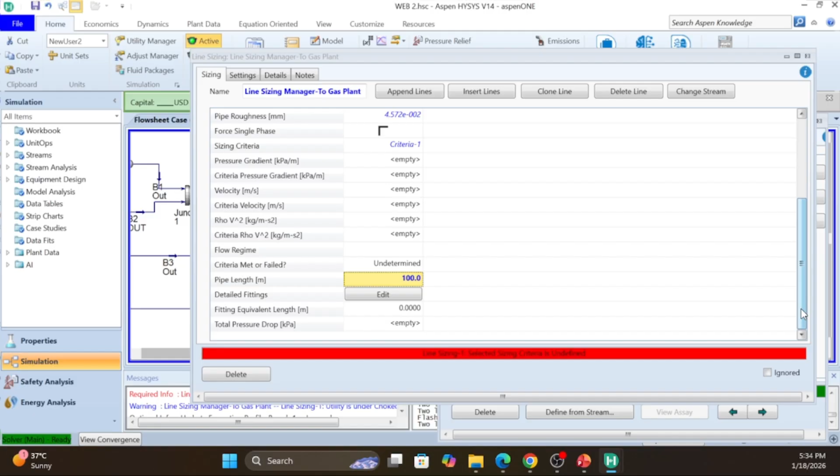And then for us to size this pipe properly, you go to settings. Now you can either put the maximum pressure gradient or the maximum velocity. Now remember we said we have to keep the velocity below 25. And also when you are dealing with your pressure gradient, the pressure drop shouldn't be greater than 10% of the entire pressure.

All right, so let's start with the velocity. So for this one, remember we have to keep it below 25. So I can just say this is running at the velocity of 24. All right, and with this, we would be able to get a length. All right, so you can see this is the diameter that we should use. This is the recommendation from HYSYS. We should make use of diameter of 200 millimeters.

Also, I can add the pressure gradients for more accuracy. So let's look at this particular. Okay, we have 210. So 10% of 210 here. Sorry, 2110. 10% of it is going to be 211. And then when we talk about the maximum pressure gradient, this is the pressure gradient per meter. All right, so since we're having 211, I'm going to say 211 divided by 100.

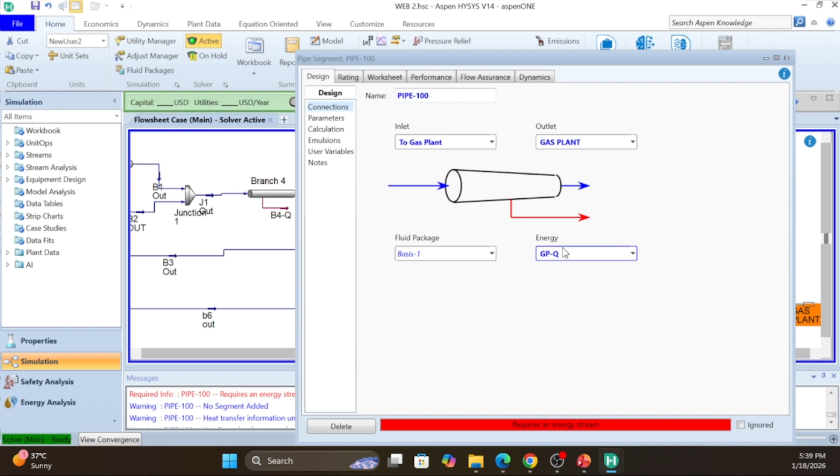So I'm just going to append just one segment, and then my length is going to be 100. Remember that was the length. We are not going to have any elevation change, and I'm going to select my schedule. Let's start with 200 first. Estimate HTC. This is going to be 5, and then include all of this. So you can see how I was able to size this particular pipe, making use of the line sizing manager. So with the aid of the line sizing manager, we are able to get this.

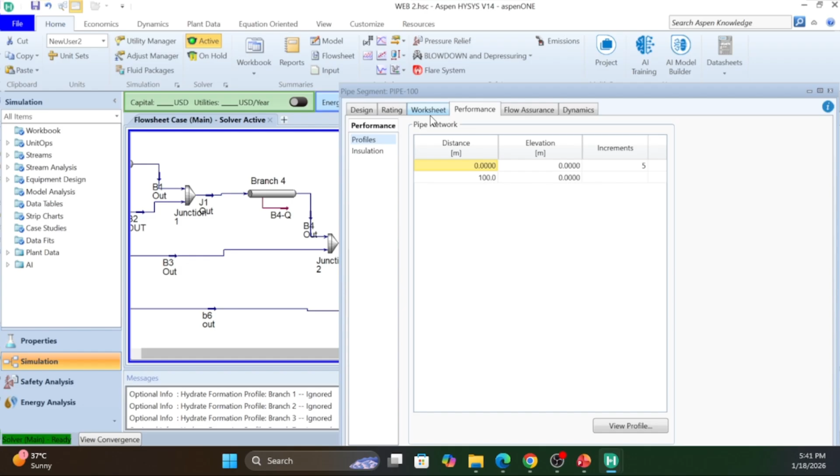Can you please check now the last pipe, which is now shown as pipe 100? How much is now the delta P? Delta P after the modeling. The one delta P we put by criteria, and now I want to see what is the calculated delta P. Okay. So let's quickly. All right. That's just about 40. Yeah, that's about 40.

I can still check the pressure profile. This is just across each length. Yeah, this is just across each length. But the delta P across this is just 40. And our criteria was, yeah, we can go up to 211. Yes. Okay.

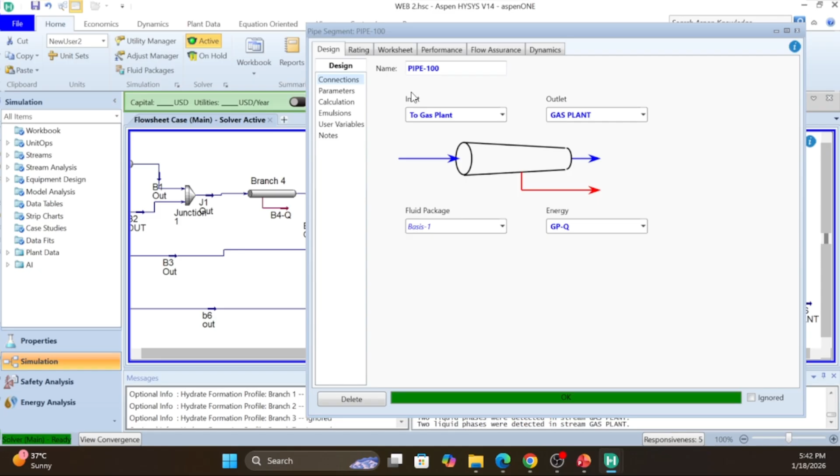Okay. Another question regarding when we were simulating the branches, we were putting the elevation changes only. But does it make any difference of the elevation number itself, which was around 650, 630? Is there any option to put these elevation numbers, or is only the change in elevation the input we can put? Because I cannot see any box where we can put this elevation.

Yes, it's just the elevation change you can add. You don't need to add the elevation itself. The elevation is just talking about the point where the pipe is situated on land. All right. So that's where we're having maybe 648, 600 and something. That's where it is. But the elevation change, which could be an elevation or depression,

is going to be the difference in the height, whether it's passing through a valley or a mountain, depending on wherever the pipe is passing through. Yes, the change in terrain. Okay, that can make sense. But my question was specifically with reference to elevation. Yeah, you can't add that.

Okay. Another question regarding the ambient temperature. Does this ambient temperature talk about the temperature in the surrounding, like in the atmosphere, or the temperature around the pipe, or the weather in that area? Okay, it's actually the temperature within the pipe and the pipe surface as well as the surrounding.

So from where does this number come? For this case we have given the number in the example, but normally, from where are we getting this number? The minimum ambient in that area for the whole year, or from the ground? From where exactly will we be getting this number? Who will be supporting us in this?

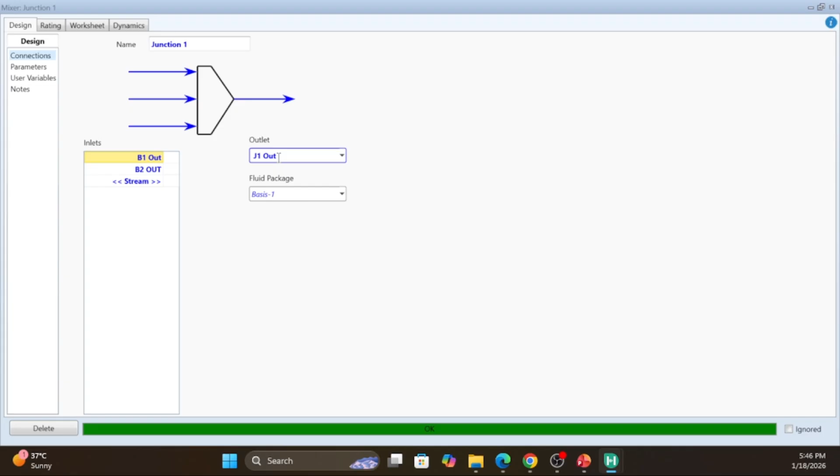I have a question. At the interconnection point, the junction point, which kind of pressure has been considered? Because we have two streams there. For the output stream, is it the maximum pressure between the two streams or the minimum pressure? Okay. So for this junction, there's a specification usually given for your mixer. If you come under parameters, you can see this is set outlet to lowest inlet pressure. So it's based on the lowest pressure.

So we have B1 and B2, and the lowest pressure is B2 out. That's why we're having J1 out. If you want to account for the two of them, you click on equalize all, and with that, we're having some errors coming up for now. So we need to, okay, let me change this back.

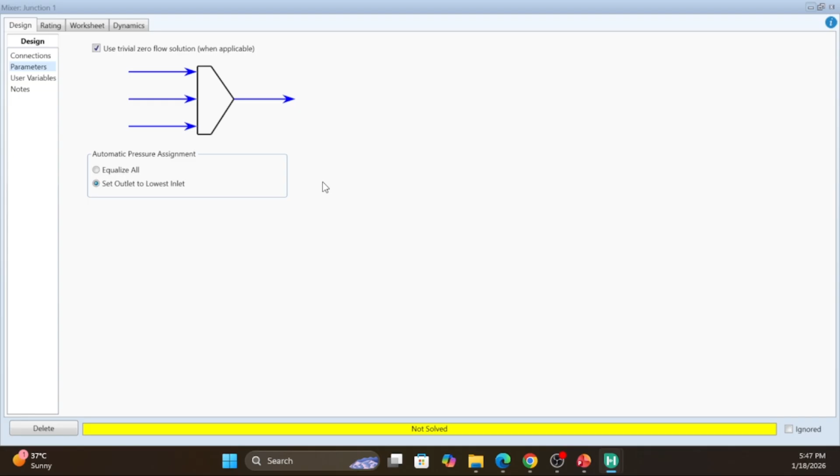All right, so you can actually equalize it, but that way you'd have to do some other things to prevent the error that came up initially. But for this one, we made use of the set outlet to lowest inlet pressure. Okay, does that answer your question?

Yes, yes. All right. But another question. We have just simulated the distributed pressure loss, no? But can we also simulate the concentrated pressure drops, for example, valves or elbows? Is it possible? Yes, yeah, if you have valves, you can add your valves to it, and then you could also add that and check the pressure drop across that as well.

So definitely there's going to be a pressure drop across the valve. All right, so it all depends. But for this particular simulation, we don't have valves attached to it. Now, if you are supposed to actually do a comprehensive simulation on this, you're supposed to have compressor stations, which would also help you to boost the pressure along the transportation line, across the entire pipeline. You're supposed to have some valves, but this is just the basics, all right? This is just the basics.

There's a lot when it comes to gas transportation, but this particular webinar was focused on the sizing of your pipes as well as hydrate formation. That's what we base this webinar on. Okay? Okay, thanks. Yeah. All right. Any more doubts? Any more questions?